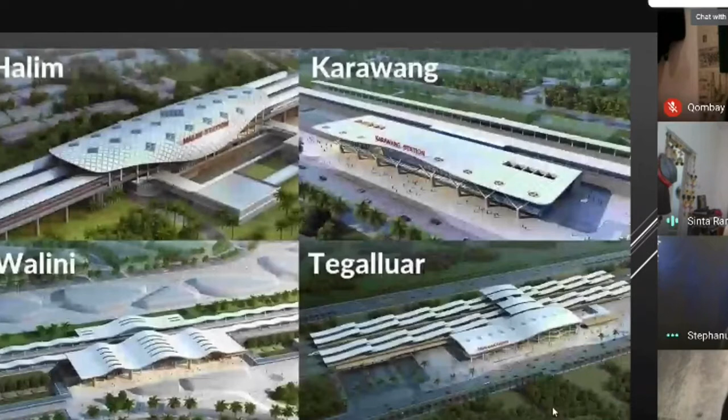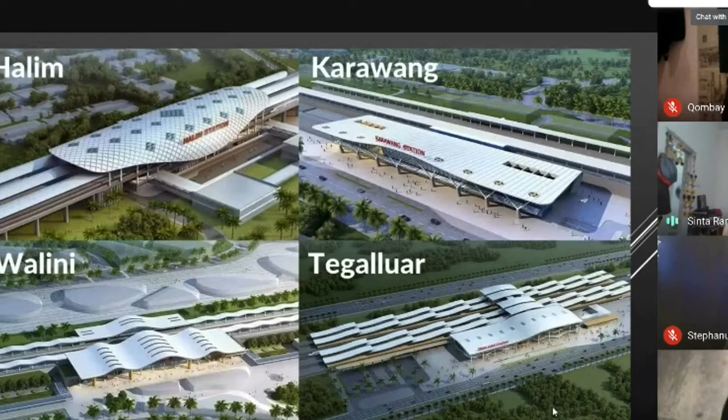Now, without further ado, let's start our meeting. As you can see on the screen, ladies and gentlemen, this is the approved design of the train station, which will soon be worked on after we have cleared all the licensing from the government. When the license from the government is secured, the first milestone will be done by the local government official. In the case of our project, the first milestone is going to be held by the Governor of West Java, Mr. Ridwan Kamil.

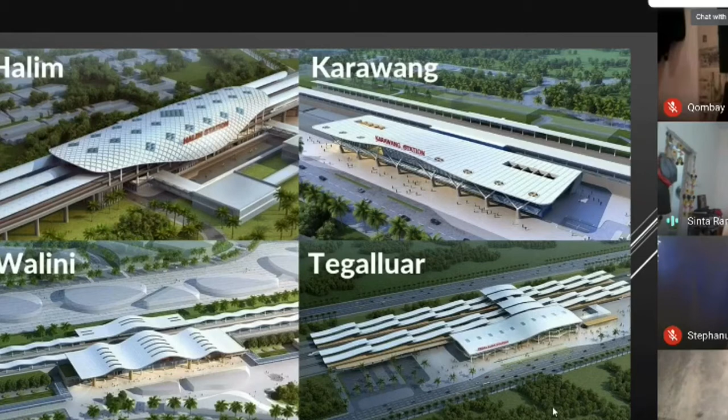Now please welcome Mr. Iqbal from the Department of Land Acquisition and Licensing to present their progress this month. Thank you for the opportunity. Good evening, ladies and gentlemen. Let me introduce myself. My name is Iqbal from the Department of Land Acquisition and Licensing, here to present our result after countless drawbacks and dramas this month.

Ladies and gentlemen, as you can see on the screen, the total surface area that will be acquired is 42,037 square meters. To be noted, the site is located in Gedebage, a sub-district within the area of Bandung City, West Java Province. At first, the location was a widespread rice field, hereditarily owned by the local residents. Then, how was the process of the land acquisition, Mr. Iqbal? Was there any problem related to the local residents?

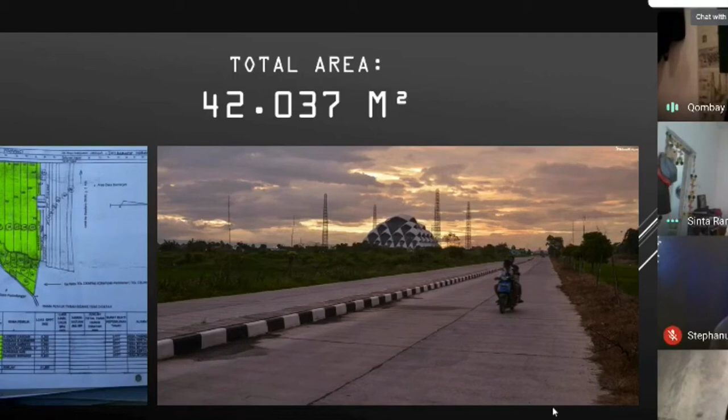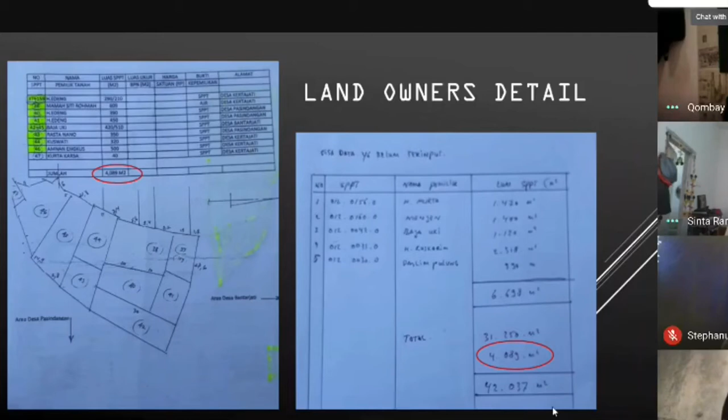On the next slide, I have prepared details of one surface area, which is only about 4,000 square meters. However, because this area is located next to the street and will be built for entrance access, we have no option but to acquire the land. So here are the details of the owner. To be noted, pros and cons are unavoidable. As you can see on the screen, the surface area is only about 4,089 square meters, the smallest among the other sites, which extend up to 6,698 square meters and 31,250 square meters.

With the help of the sub-district officials, we negotiated with the land owner, who was still in doubt about releasing land passed down by their parents. The negotiation lasted for 4 hours, and in the end we made an agreement. The land owner agreed to release the land. Because of the limited time, we decided to remeasure the land the next day along with the National Land Agency to get certain boundaries that will be legally approved by the national law system.

The conclusion from the Department of Land Acquisition and Licensing: first, in total 42,037 square meters of surface area have been acquired and are completely ready to be developed. Second, the negotiation process with the local land owner has finished. Third, the process of ownership deed changing and merging by the notary is done. And last, the license for the Environmental Impact Assessment, or as we call it AMDAL, by the local government is ongoing and will be done within 10 working days. That will be our presentation.

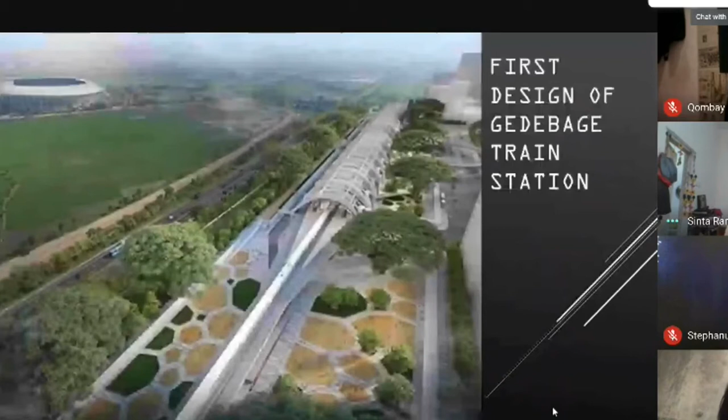Thank you. Alright, thank you so much to Mr. Iqbal from the Department of Land Acquisition and Licensing for your explanation. Next will be the report from Mr. Dimas from the Department of Architecture and Landscape Designer. Please welcome. Thanks for the opportunity.

Ladies and gentlemen, as we can see on the screen, this is the first design of Gedebage High-Speed Train Station, Bandung. As mentioned before by the representative of the Department of Land Acquisition, not only is it located on a paddy field, Gedebage is known for its hot weather in the daytime. For that, we have put large trees for cover and to make the station look more like a green station. On the exterior, we are following the custom in Bandung City, pioneered by our governor, Mr. Ridwan Kamil, which is to enlarge green areas and parks.

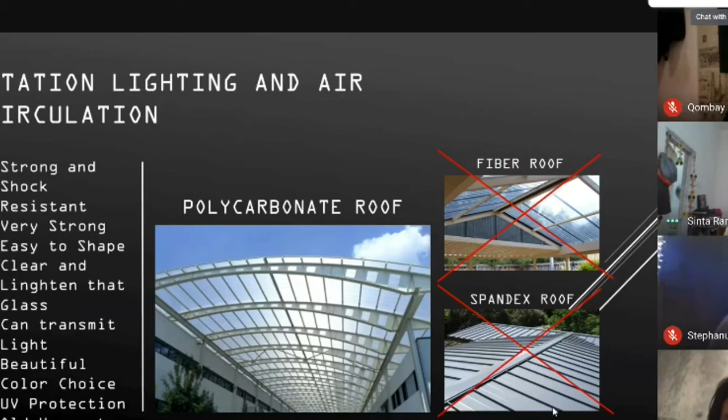For the interior, air and light circulation have been calculated. Air circulation will not disrupt any activity because we have designed ventilation columns with current technology that are attached to the ceiling and concealed so that they will not ruin the interior design. In the nighttime, the light system will shine yellow. This color will create a homey and comfy ambience in the station.

Why we decided to do that? Because this high-speed train station will be connecting two metro cities, which are Bandung and Jakarta. People of Bandung who are coming from Jakarta will find the feeling of home. Besides that, yellow light has high visibility even in rain or fog, so that the train with white light will find no difficulties to see its destination and surroundings.

In the station, there will be a food court, food stalls, and a souvenir store that will be owned by local residents, so that the station is going to be an economic center for Gede Bage people.

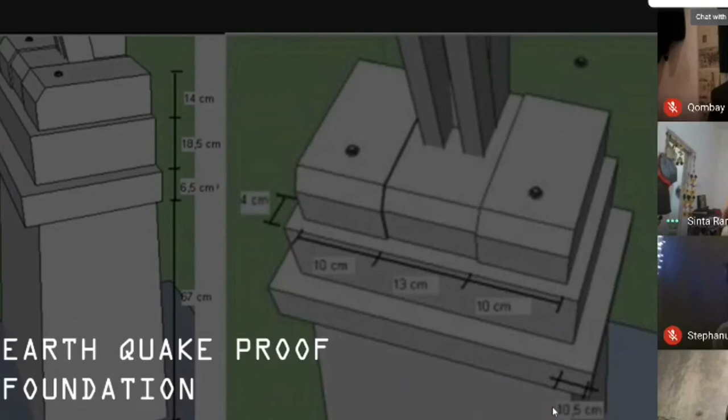Okay, thank you so much to Mr. Dimas from the Department of Architecture and Landscape Design. Thank you for presenting your idea. Well, the next department can be said to be the most important department of this project. Please welcome Mr. Hamza from the Department of Construction and Development. Thank you for your time. Alright, straight to the content of the presentation.

All solid buildings start from the foundation. After consulting with the architectural division, we have pocketed some important details in the station construction. Because the land that we are going to build on is paddy land, the foundation that is built is also not a conventional foundation like in other buildings. It is our duty to solve that problem.

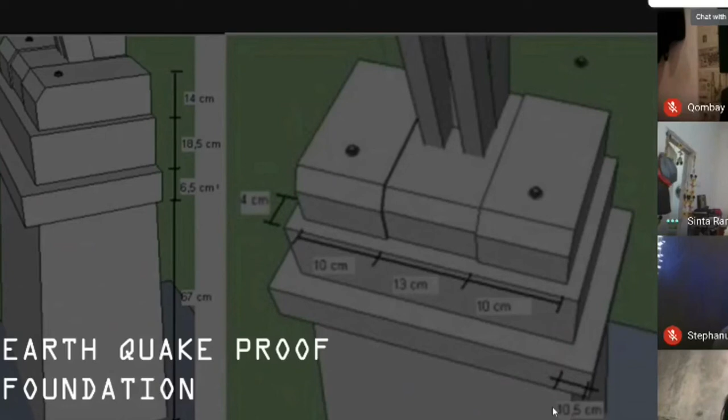First, of course, we will build a very large and strong earthquake foundation. This is important even though Gede Bage is not included in the Lembang fault line, which will someday shift. But Gede Bage is the lowest point or area in the city of Bandung, which means in the event of a Lembang fault shift almost 30 kilometers away, Gede Bage will feel a bigger impact than the surrounding area. So for the foundation of this station, we will use earth nails. Earth nails that are strong and grip the ground so that they will withstand earthquakes to a sufficiently large force.

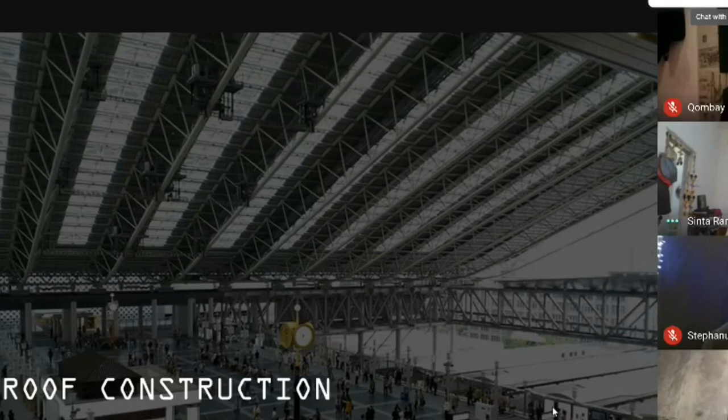Our next focus is the roof construction. Why is that? A high roof made on wet ground is a special task for us. Because the high roofs will be built using heavy equipment tens of meters in height, the land to be stepped on by the heavy equipment must be ready to accommodate tens of tons of loads. So before we start building the tall bones as support columns, we have to prepare the soil first. And as we know, during the soil compaction period, it is not good if there are heavy construction activities around it.

For the type of heavy equipment used, because the only road available from the start was an asphalt road with a width of 6 meters, we needed a wider area for access in and out of these vehicles. First, we need sand to cover the wet rice field and make it hard. After the soil becomes hard, and I estimate it will require hundreds of cubic meters of sand, we still cannot accommodate the loads of other heavy equipment.

The soil must be further strengthened with additional materials and an earthquake-resistant foundation as I described earlier. And what I emphasize is that this will take longer than usual development, just from the soil hardening. But this certainly won't be a significant problem because we have the best team.

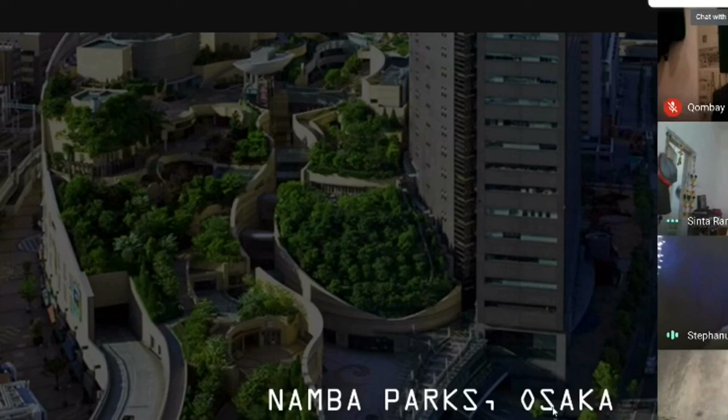There will be a lot of plants on the open roof area of the station to support the idea of the Green Station theme. This is a picture of Namba Parks in Osaka, Japan that inspired us to build this Green Station concept in the first place. As you can see in the picture, Namba Parks has its own soul in a crowded city. We are also going to have green ornaments on the roof that will cover the rooftop area.

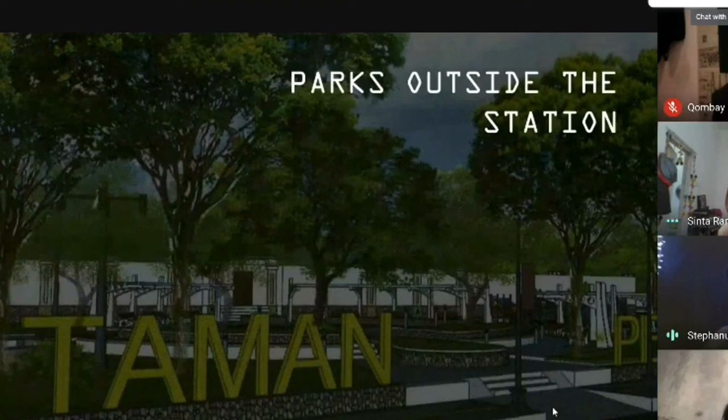We will have 1 hectare for the other area, split in half on the left side and the right side, precisely 5,000 square meters each. There will be an open park with big trees on the left side. It's for the public, and there will be store spaces for the local community to sell their products. While on the right side, where the sun sets, we are going to build a public sports center such as a skate park, open gym, and mini futsal field that will be well managed by the district government.